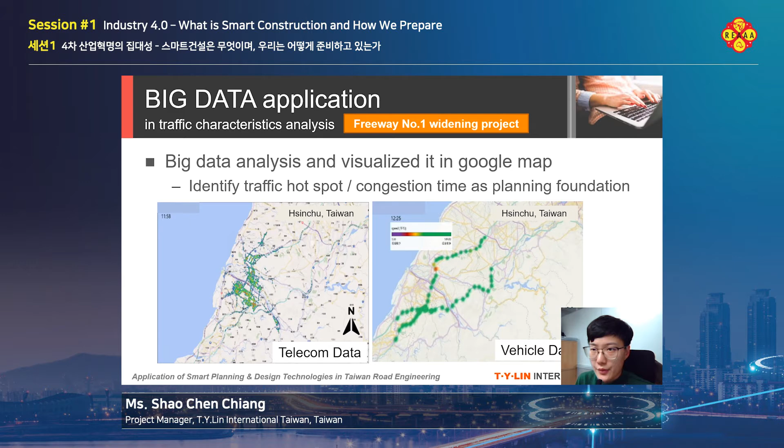So after we identify the target area, the target construction location on the freeway, we zoom into that specific area. We collect the vehicle data from 2014 to 2020, and we sort it into weekday, weekend, and holiday. The southbound lane is on the left side of the table here, and the northbound is at the right-hand side of the table here.

So we noticed that the congestion happens on weekend in the afternoon. However, the congestion on weekend was improved from 2017 after the approval of using the hard shoulder. But then we found out that during holiday, there is still congestion happening here. So we try to understand why, and we'll have a closer look at it.

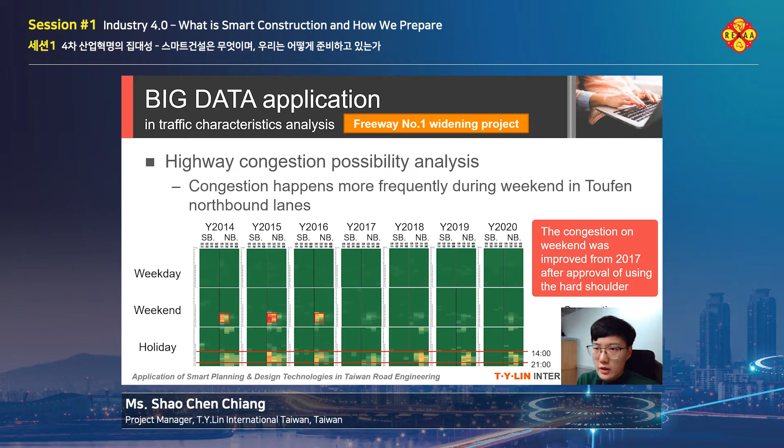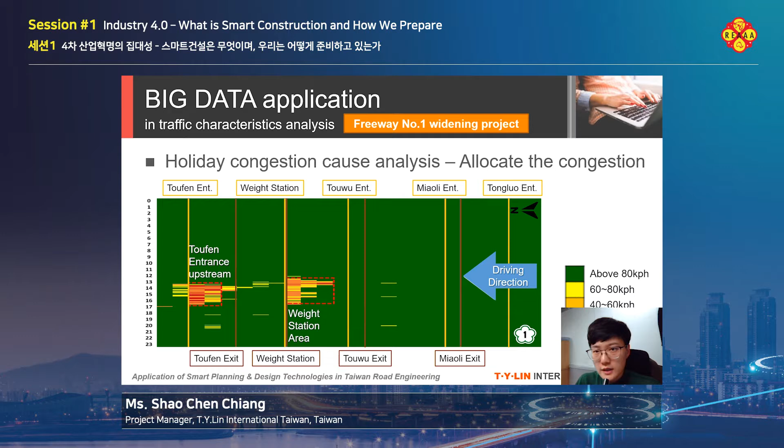We discovered that on the northbound lanes from Tongluo to Toufen, the congestion happens at two specific locations. First one is before Toufen entrance, here, and the second one is before the weight station area. There is congestion happening at both in the afternoon, and the speed dropped down to only 20 to 40 kilometers per hour - it is quite slow on freeway.

First, let us look at the area before Toufen entrance. We discovered that the congestion starts near the end of using the hard shoulder. We then realized that the cause of the congestion here is because the traffic on the hard shoulder interweaves with mainline traffic that is going to the Toufen exit. The interweave makes the traffic slow down and cause the congestion, as shown in the graph here.

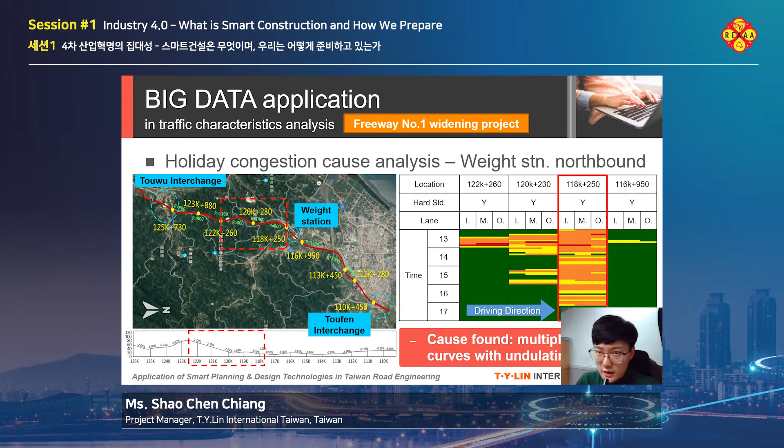Then, let us look at the weight station area. We found that the congestion starts at 122K and ends at 118K. Then we look at the horizontal around this area. We discovered that there are multiple reverse curves with small curve radius, and vertically it is also quite undulated in that specific location. As a result, the traffic will definitely slow down in this location and cause the congestion over here.

After we identify where the congestion are and the cause of it, we give the corresponding improvement proposal. For Toufen, we propose to extend the northbound decelerate lane, and for the weight station, we propose to extend the northbound accelerate lane. It can not only give more traffic capacity, but also solve the specific congestion problems.

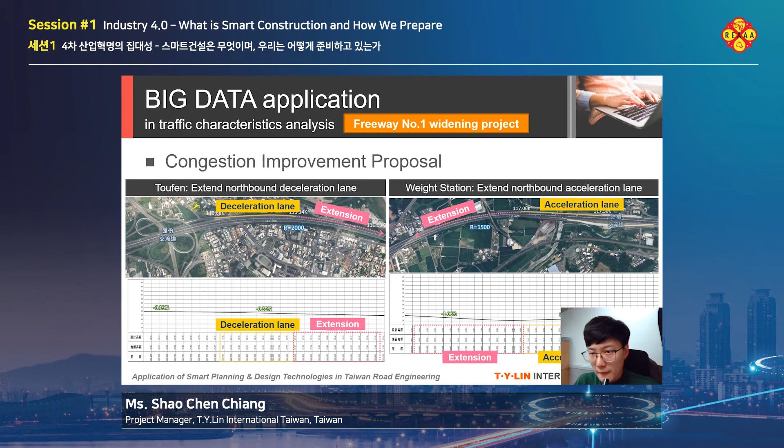Then, secondly, I would like to share with you is what we did with LiDAR and UAV survey data, along with our Revit BIM model. We start by control survey, and then we move on to topo LiDAR survey, as shown in the picture here. Here is the survey situations.

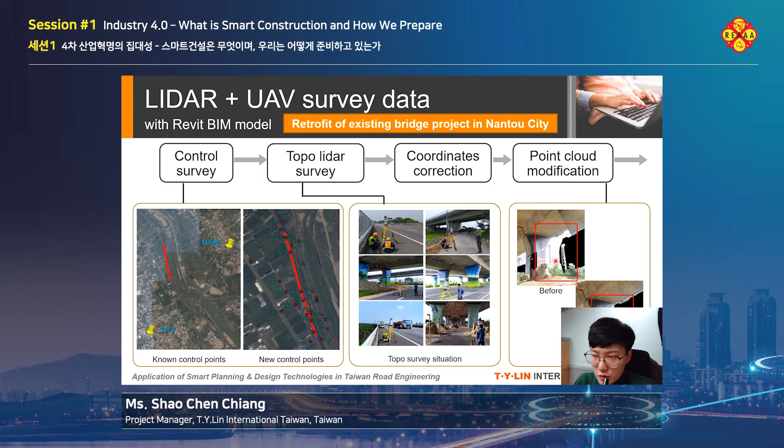And then we do some coordinate corrections. And the most important thing is the point cloud modifications. Before the modifications, the point clouds are not overlapping with each other. After the modification shown here, you can see the two towers is overlapping correctly with each other.

So here is our final LiDAR point cloud result. You can see clearly the existing bridge and the railway beneath it here. All the details here, and even the electric wires of the railway here.

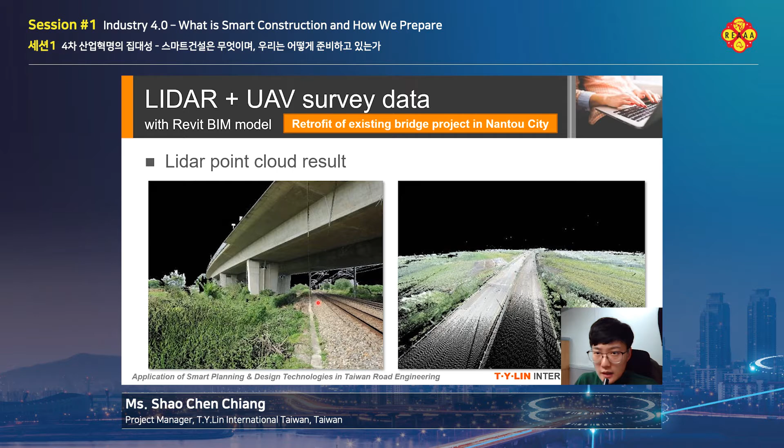This project is the retrofit of the existing bridge, so our design engineers finish the calculations and do the Revit BIM models in Revit. So you can see the capping here, the capping reinforcement here, and also the foundation enlargement here.

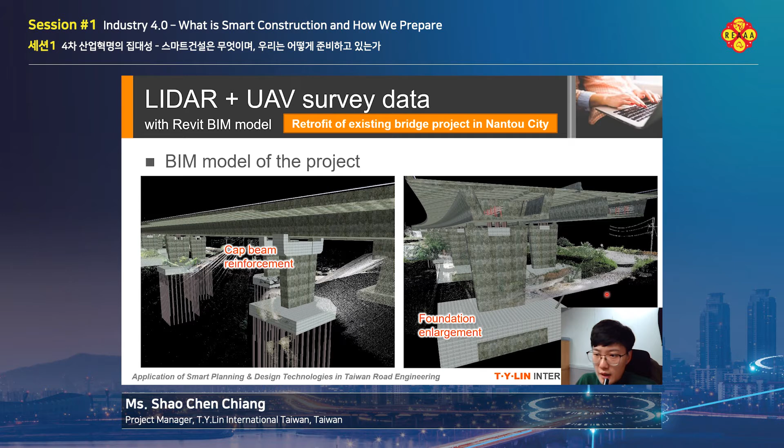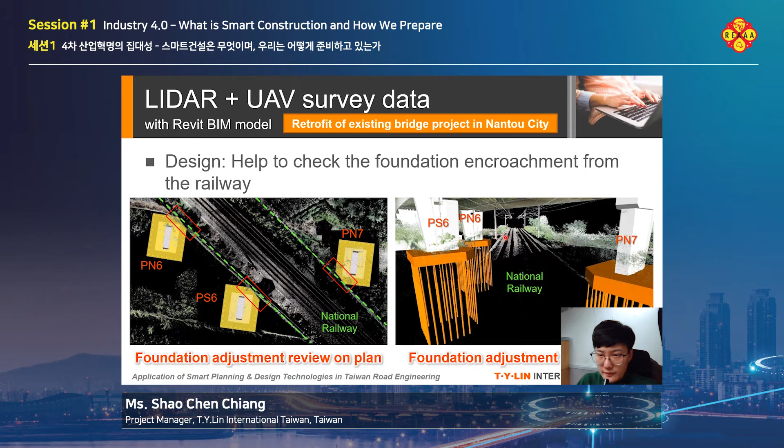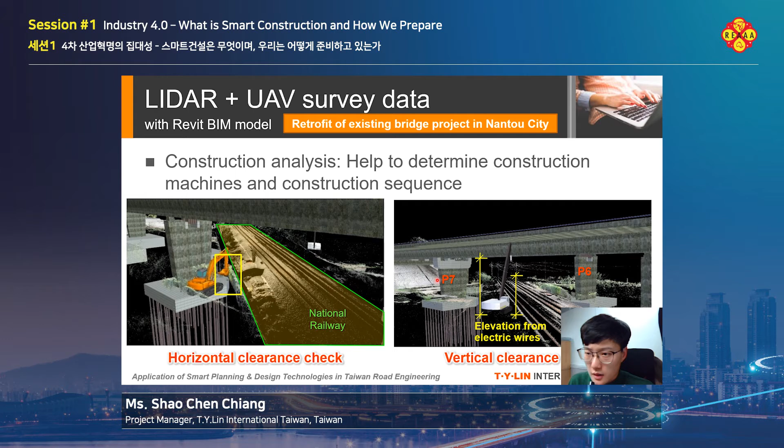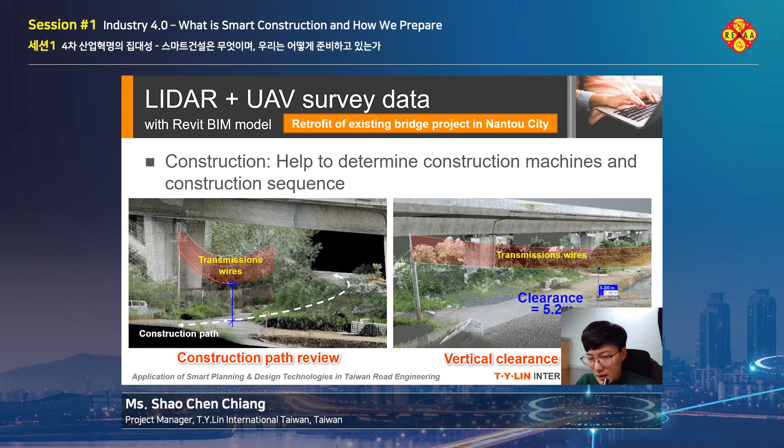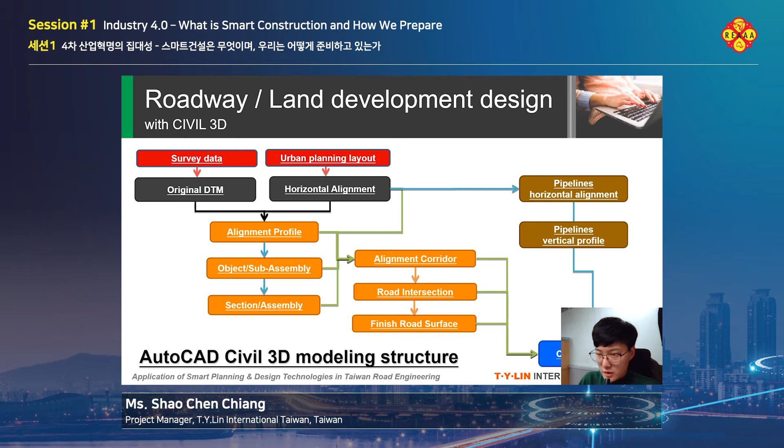With all this, we can generate our alignment 3D corridor. Moving on, we can have road intersection component and finish the road surface. For pipeline wise, after we have the horizontal alignment, the pipeline will develop its own horizontal alignment as well, and its own vertical profile. Combined with the roadway corridors and the pipeline networks, we can generate the combined models.

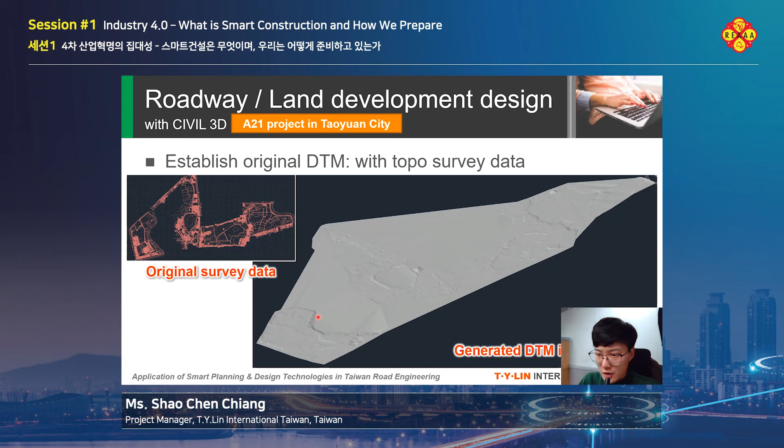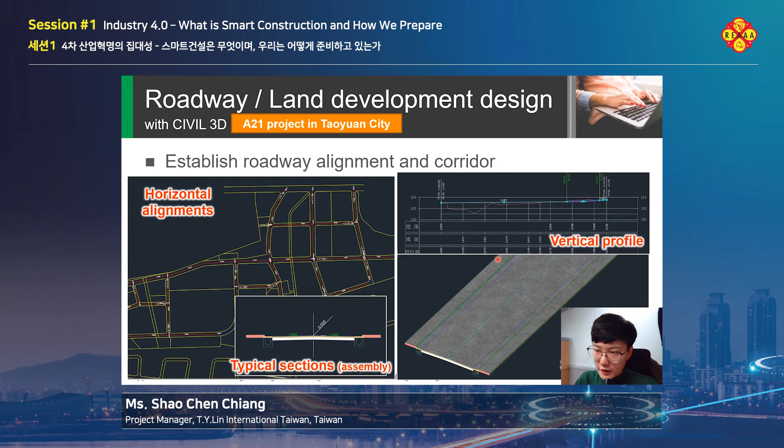Then we establish the horizontal alignment as shown here, and then we do the vertical profiles. When we do the typical sections, which is called assembly in Civil 3D, and combine these three, we can generate the corridor here in Civil 3D.

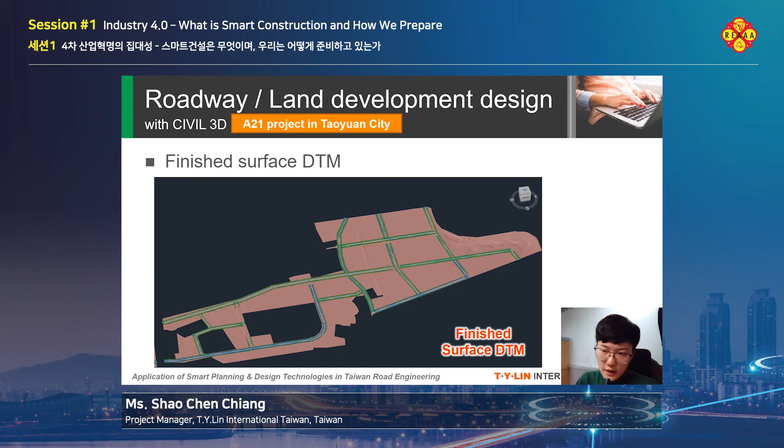Since it is a land development project, we combine all the roadway corridors, all the roads here, together, and then we can have our finished surface DTM.

For pipeline-wise, we also established the pipeline models. Here you can see the common duct pipe network and also the drainage and sewage network. Most important is that we also build up our pipeline manholes accordingly, so you can see all the manholes in the common duct system and also in the drainage and sewage system.

For the pipeline vertical profiles, we can combine it along with our roadway alignment. In the profile view here, there are some manholes misplaced, shown in the yellow circle. So we can adjust it just on the profile view, dragging it down to the correct location to do the adjustment.

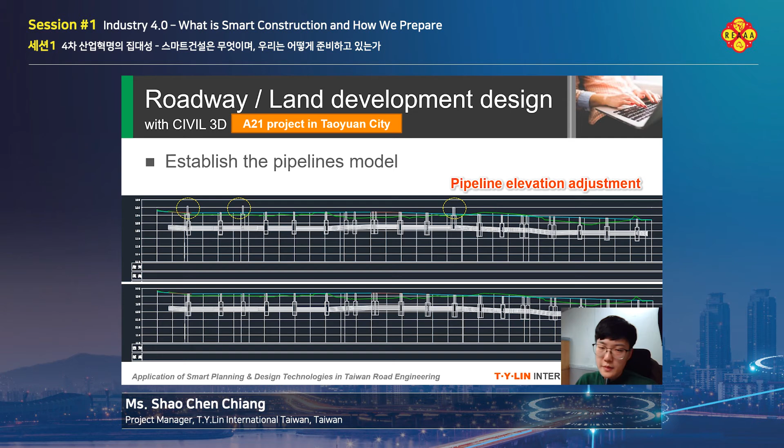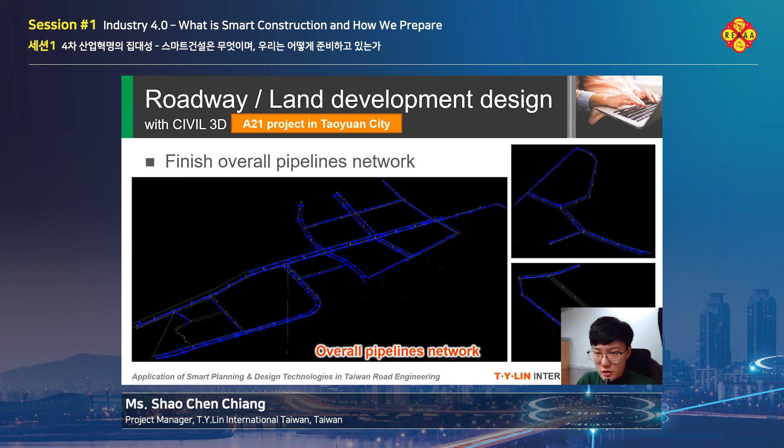Here is our finished overall pipeline networks, combining the common ducts, the drainage and sewage system all together. And then we combine our roadway corridor and also the pipeline corridor into one BIM model.

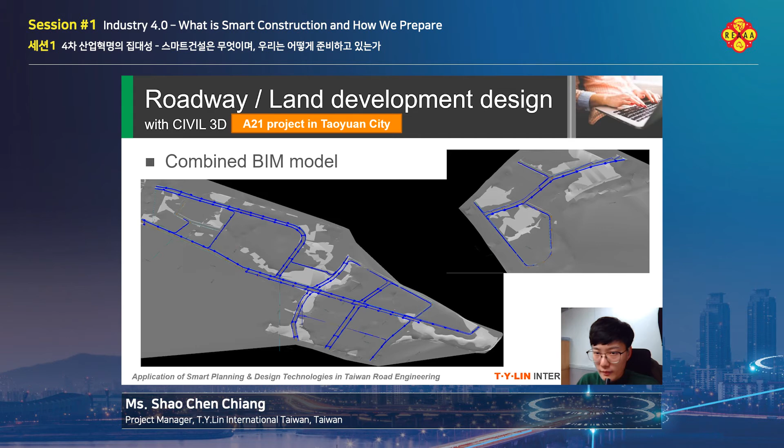Furthermore, we can also do the conflict detection. Here's an example: the sewage manhole conflicts with the drainage box culvert, so we can thus adjust the sewage system here.

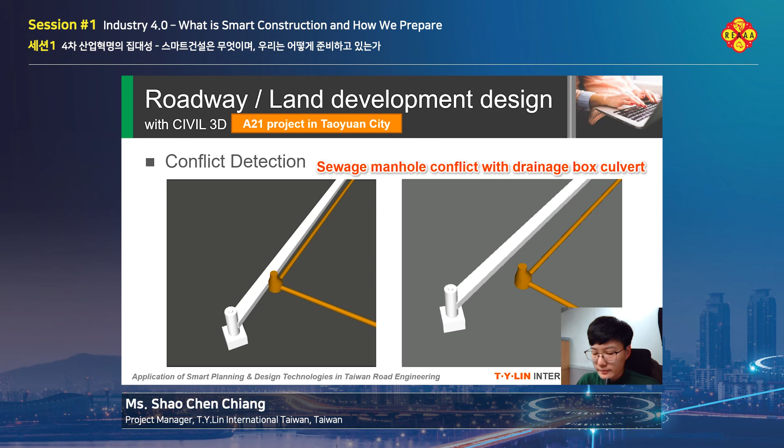Here is another example, the Xinzhuang project in New Taipei City. We also generate the original DTM using the topo survey data, and through the triangular method, we can show it in elevation analysis. A darker place means lower parts, and the brighter one is the higher ground.

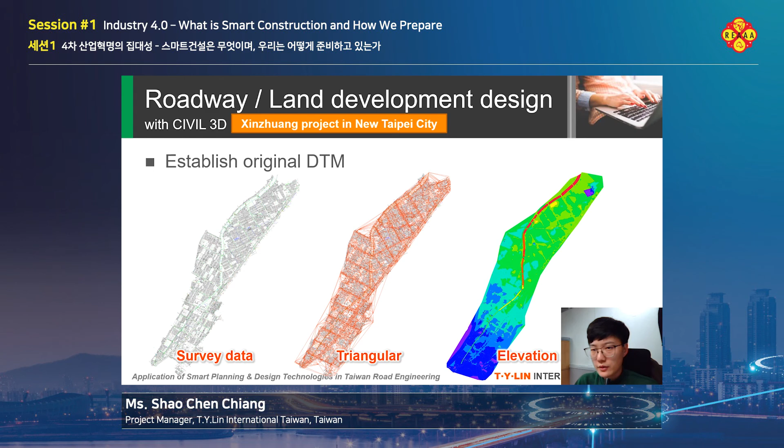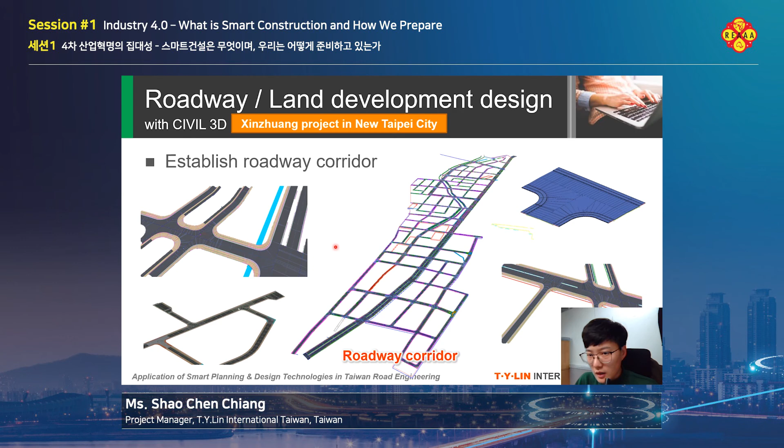We also generate all our roadway corridors here, the combined corridors. You can see we do the roadway intersection component, all of the corridor components here.

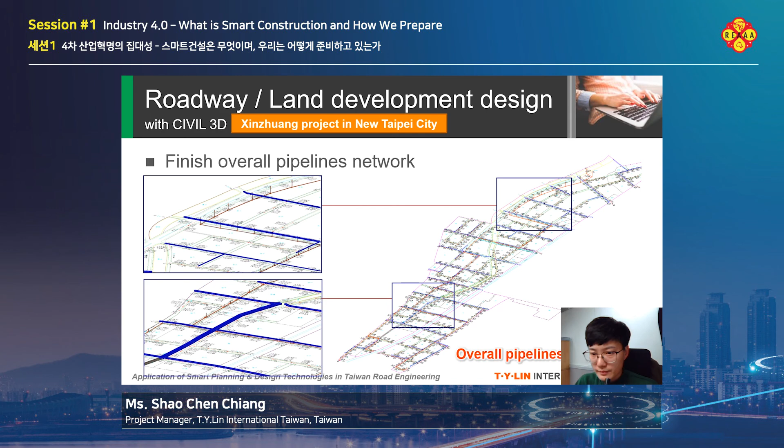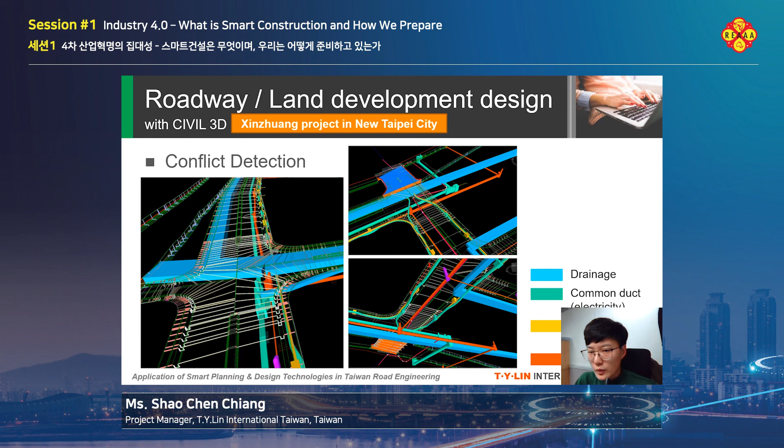We try to combine our design with smart technology. Our goal is to design smart and also to do smart design. Hopefully, in the near future, all the roads in Taiwan will be smart roads and all the cities will be smart cities. This is the end of the presentation, and thank you for your time.